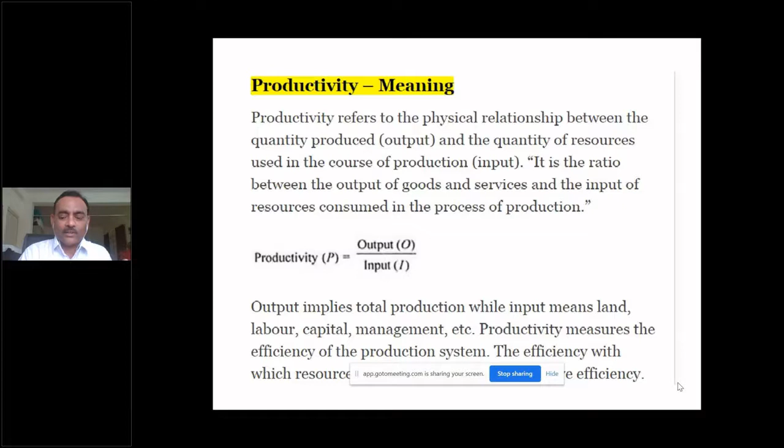As I am an engineer in Bhilai Steel Plant, I am concerned with one of the most important factors, which is a technical factor. Using the example of blast furnace productivity, in which we produce iron, I am going to describe how the productivity of a process can be improved, and what are the factors which affect the productivity.

While doing this, we know there are so many factors, some of which are positive and some negative. Not only do positive and negative factors affect productivity, they have an effect to some extent, some very small amount, but we don't know the coefficient of those factors. If we are able to know what the positive factors are, as well as their coefficient, and simultaneously in the case of negative factors also, we can improve productivity by working on it and removing or diminishing the negative factors.

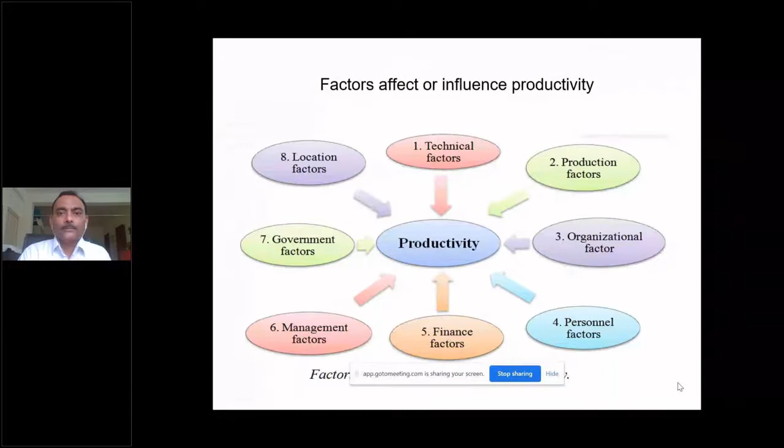Those attending this seminar have studied the blast furnace process. A blast furnace is a giant chemical reactor in which about 2758 chemical reactions take place simultaneously, more or less out of control. Note this factor, 2758 chemical reactions - it's a very big, huge number, and we are not able to control each and every one. But a few are very important, and out of those, I have taken the most important few into account.

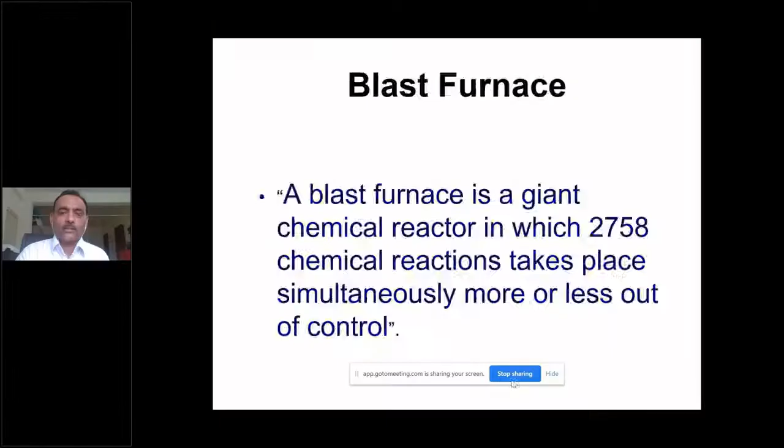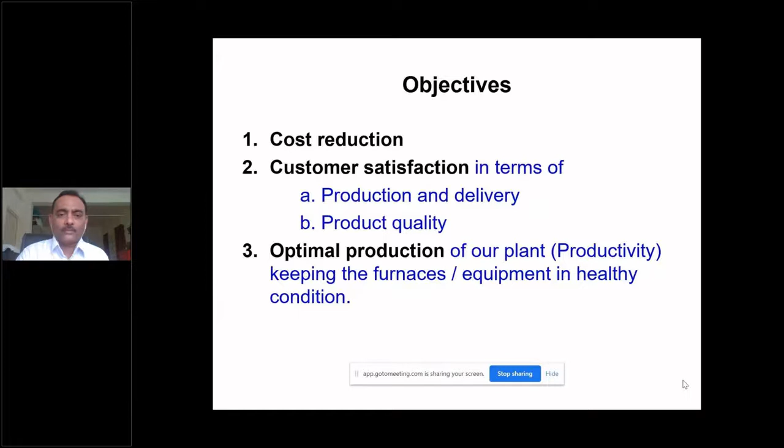The objective is cost reduction, customer satisfaction, and optimal production.

This is the overview of the blast furnace. The central part of the furnace is the basic furnace in which we put all raw materials through this skip hoist system. We send hot air at a temperature of over 1000 degrees, and the input to the furnace is iron bearing materials, which are iron ore and sinter, from which we extract iron. The second thing is we have to put coke inside the furnace, which burns. But in the process, when we send the raw materials, some undesirable particles also go inside.

They are silica, alumina, some magnesium oxide, manganese oxide, etc. All these raw materials are not needed in the furnace, but in the process they will go inside, so we have to remove them. For that we add limestone, because limestone contains lime, and lime will make slag by fluxing all these undesirable oxides.

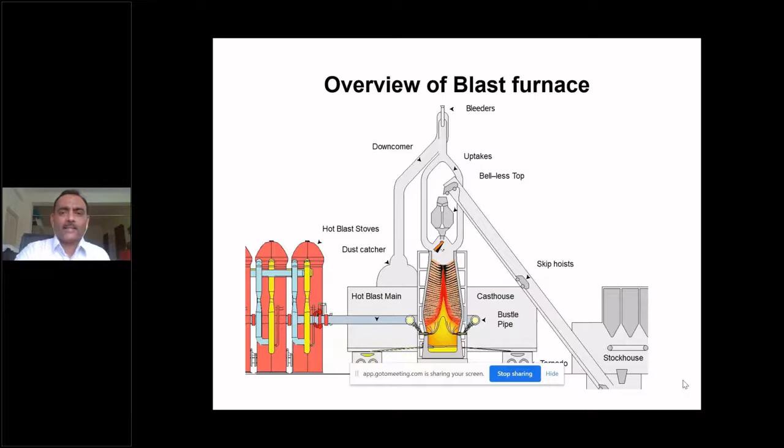And for sending hot air, we have stoves. This is the basic thing in the blast furnace, by which the blast furnace runs. These are the temperature zones. In front of the tuyeres, this is called tuyere, from where the air goes inside. Maximum temperature is near about 2200 degrees centigrade.

Everything charged inside the furnace, except coke which burns, all other raw material melts. From top to bottom, temperature will improve. We charge raw material from the top, and from the bottom level we send hot air. Because of this hot air, coke burns and melting happens in the furnace. These are the different zones in the furnace.

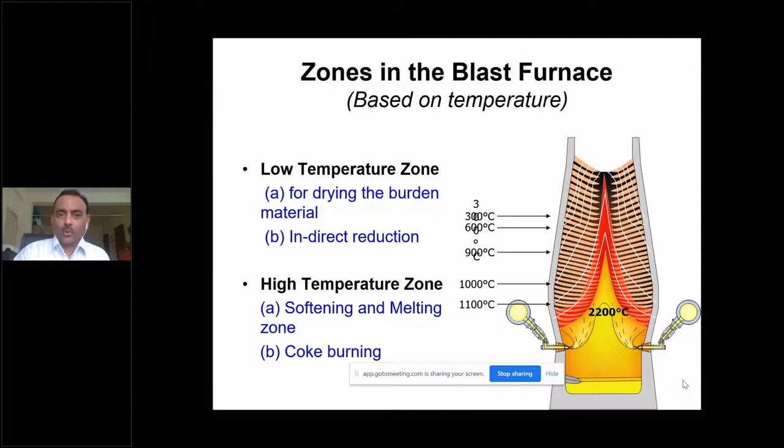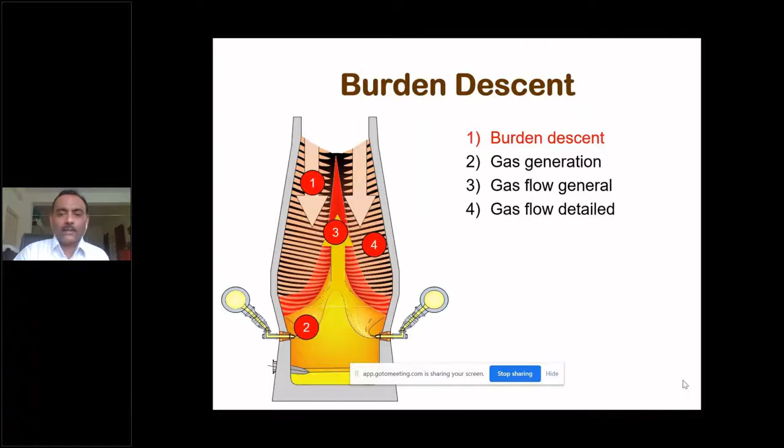Quite naturally, gases go upward and raw materials move downward. When melting happens in front of the tuyeres, we remove the hot metal and slag from the furnace. By this diagram it's clear, the coke is the only thing which looks black, through which the permeability happens.

The gases go upward, and these black layers are a layer of coke, while the reddish layer is a layer of iron bearing material like sinter, iron ore, and some amount of flux.

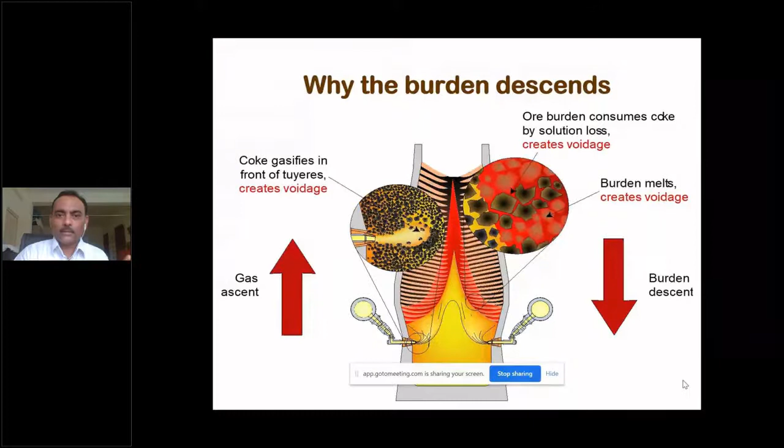This is the burden. Burden means the calculated amount of raw materials which we charge inside the furnace. Due to the reaction and melting, quite naturally raw materials move downwards. At the upward level the temperature is less, and at the downward level, when the raw materials go down, melting happens and the movement of the charge downward occurs.

But we continually charge the materials, which means the level of the furnace we always maintain, maybe 1 meter or 1.5 meter. So two forces work: upward force of blast and downward force of raw material.

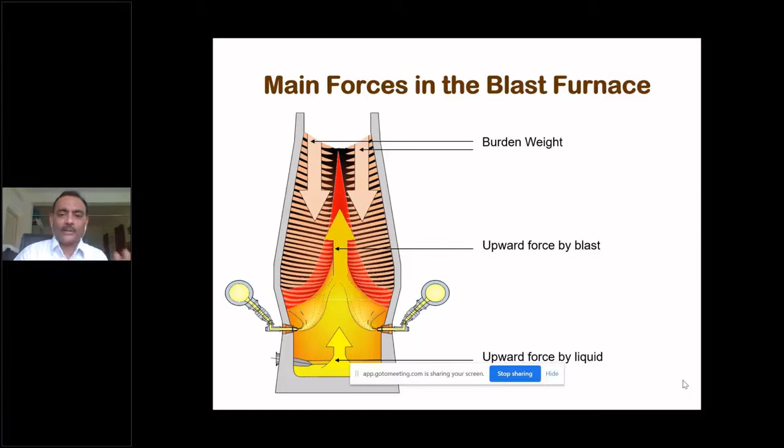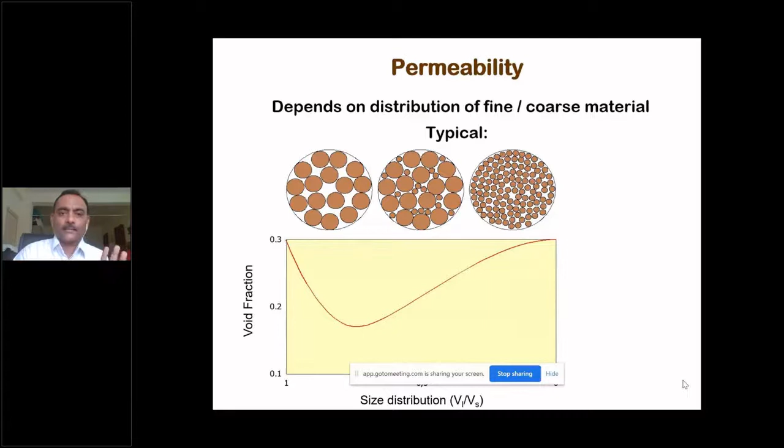Bigger size is coke and smaller size is sinter and ore. So we don't want only smaller size raw materials or only bigger size raw materials, we want a combination of both. The middle circle is correct, and this is in front of the tuyeres.

Actually my focus is productivity, and I am coming to that very soon. But for someone not knowing about the blast furnace process, we have tried to describe with this diagram how the blast furnace works.

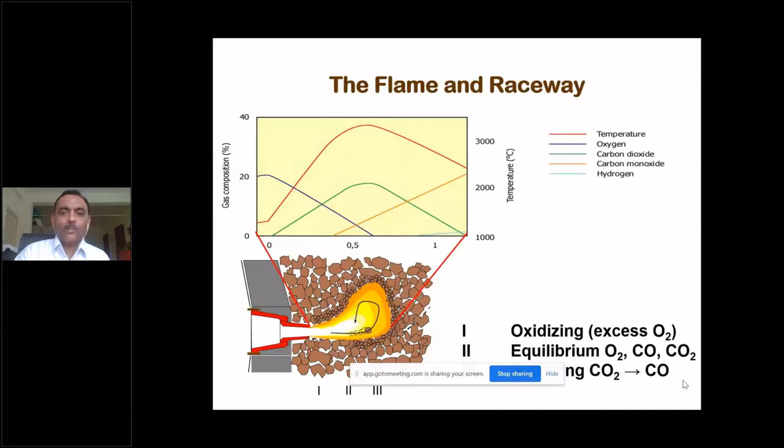Now comes the productivity part. As I said, there are so many raw materials we use. Quite naturally, we want our iron bearing material's Fe part to be good, and in our sinter, the Fe part should be good. As for coke, it must have good quality. The quality for coke is it should have very good flux, fixed carbon, and ash percentage should be less.

When you use sinter, Fe should be good. When we send hot blast, temperature should be maximized. Charging practices show how the raw material is distributed inside the furnace. When you remove the metal and slag from the cast house, what type of practices are involved in the cast house?

Not dry cast means whenever you open the cast, all the liquid which is inside the furnace should be completely removed, and then tapping should be closed. So not dry cast is avoided.

Taphole clay: as very high temperature metal and slag continuously come out of the tap hole, the clay through which the tap hole is closed, if it erodes, quite naturally we are not able to drain all of the hot metal and slag from the furnace.

Use of high top pressure: we are sending hot air from the lower level of the furnace. When it goes inside, it reacts with the carbon and forms carbon monoxide. Carbon monoxide, which goes inside, comes in contact with Fe2O3, iron ore, downwards. So the reaction between gases and solid should be more.

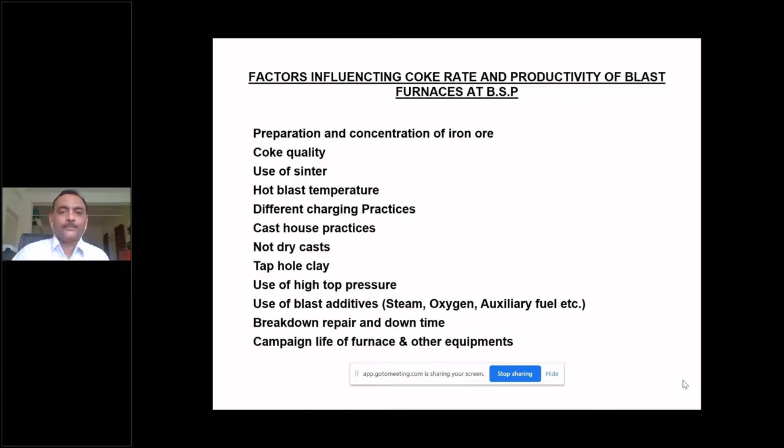Now comes the productivity part and coke rate part of the blast furnace. I have to explain by example, as I'm sitting in this room which has some volume. As well as that, when we talk about the engine, it has some volume. As well as in case of any type of equipment which we're using for production, the volume of that equipment is a very, very important factor.

So in case of blast furnace, what is the volume? The inside volume in which we send the raw materials. Now if a furnace is producing 1000 ton per day, and the volume of the furnace is also 1000 meter cube, so in case of blast furnace, the definition of productivity is tons per meter cube per day.

As a second example, productivity based on working volume. As well as that, from the hearth area point of view, we can also calculate the productivity. We can also calculate the productivity by useful volume. So these are the formulas written.

So as I said, a 1000 meter cube furnace, if it produces 1000 ton a day, the productivity is 1 ton per meter cube per day. If by working on the factors which affect production, somehow I am able to produce 1200 ton from that furnace, in this case my productivity will come to 1.2 ton per meter cube per day. But how have I done it? How have I improved the production? So here comes the calculation part of the productivity.

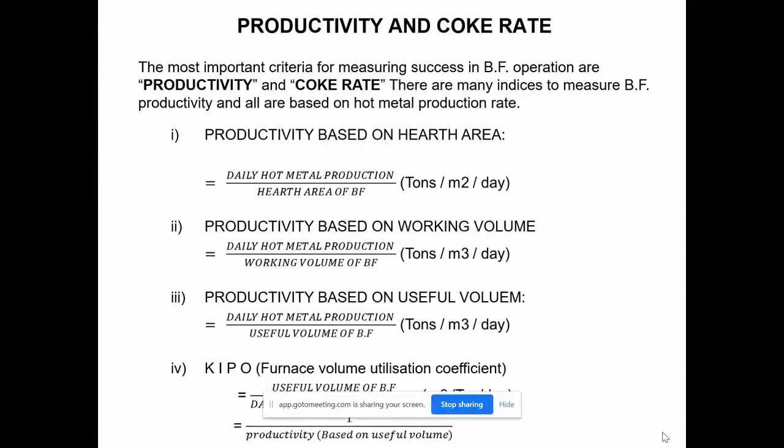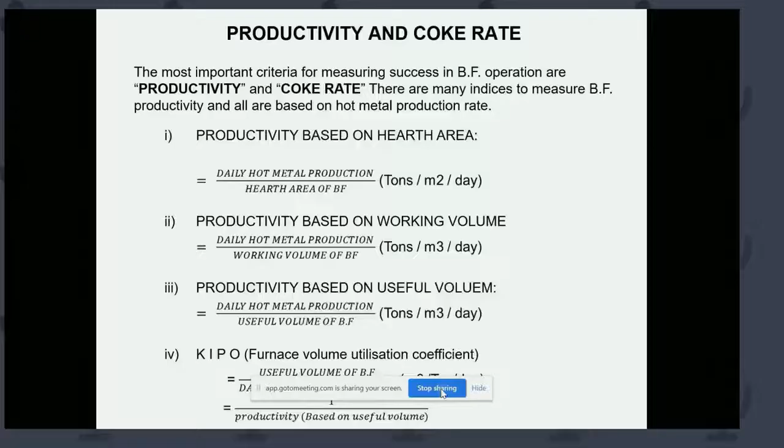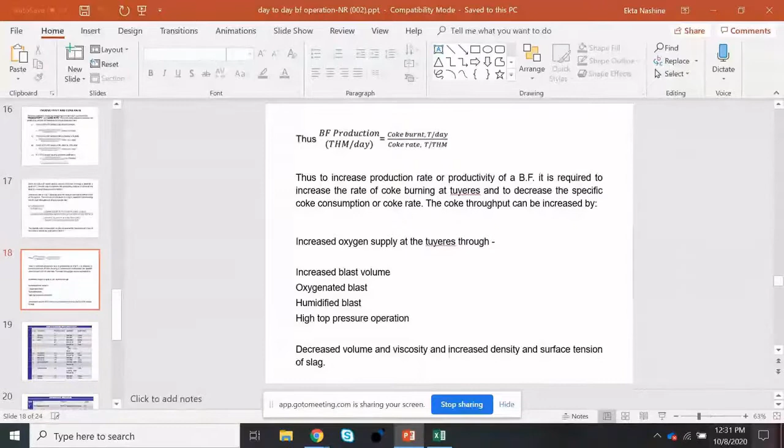Hello, sir. Yes, sir. Your PPT is visible, sir. Next slide, I am not able to move on. Just a minute, sir. Okay, sir, now it's visible. No, sir, the video is not available. Okay, it will connect now. PPT is visible, yes, but the video, camera is not available. Video part is not available. Now it's okay, sir. You can share slides, sir. Okay.

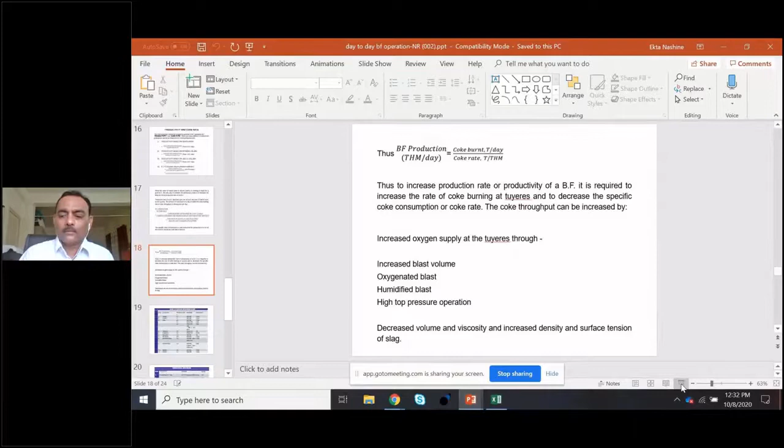So these are the definitions of productivity. It means from a furnace, if I am able to produce more tons, my productivity improves.

As well as in case of coke rate. Coke rate is what? For producing 1 ton of hot metal, the amount of coke which is needed, that is called coke rate. In a fixed volume, we are charging two things: one is coke and another is non-coke. If I'm able to reduce my coke, quite naturally, from that fixed volume, non-coke will incorporate more. I have to look at my heat value, because from coke heat will come, from hot blast heat will come, from coal dust injection heat will come.

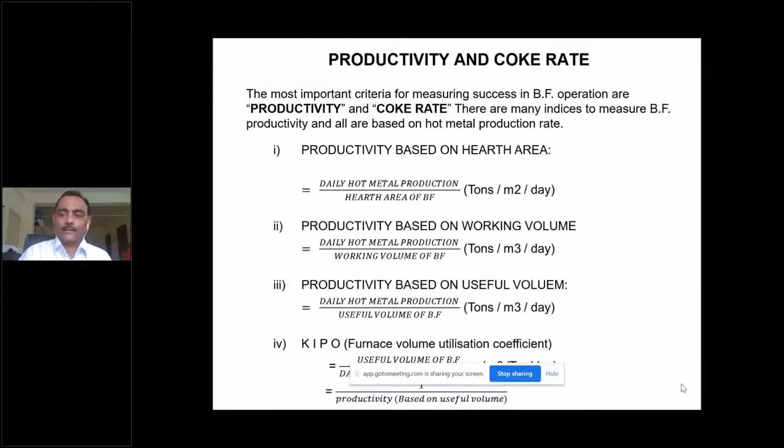So I have to counteract. But if somehow I am able to reduce the coke part for 1 ton of production of hot metal, quite naturally, again my productivity will improve, because my production will improve and coke rate is reduced. So in the process of making hot metal from the blast furnace, if we are able to reduce coke rate, naturally productivity will improve. They are both indirectly proportional. These are some definitions and how it will improve.

Here comes the productivity of some of the world's best furnaces, their burden, and what are the injectants. Injectant means, as well as coke, they are charging some amount of coal, that is called coal dust injection. In some areas where gases are available, natural gas, mostly in South America, they are injecting gas also. Some inject oil also. In some areas, they're introducing one or two more things with coke.

Burden: in the era when lump ore was reducing too much, from the 1970s, sinter comes into the picture. Sinter is nothing but small particles of ore which is agglomerated.

Agglomeration is heating just below the incipient fusion, meaning small particles of iron ore with fine particles of coke and lime dust, combined with the help of moisture, are preheated up to that temperature where melting will not happen. Only the particles combine with each other. The surface gets hot and they join each other, so small particles become a bigger particle. In the blast furnace, as we need some size of material, this can be charged inside the furnace. That is called sinter. With the help of microfines, we are able to produce pellets. So these are the burden part and injectant.

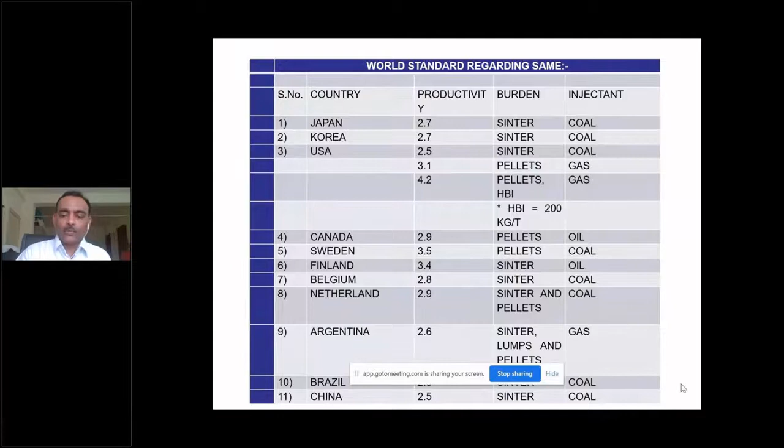And these are some best parameters related to the factors which I mentioned. One furnace in Netherlands, furnace number 7, Hoogovan - Hoogovan is the design of the stove - their productivity reached 3.37 tons per meter cube per day. In the same furnace, their coke rate is 268, very small. I'll come to the picture of Bhilai also. The 268 kg per ton of hot metal is very small.

There is one furnace in Japan in which the coal dust injection reaches up to a level of 266 kg per ton of hot metal. Hot blast temperature in Japan, one furnace, 1350 degrees centigrade. Top pressure 2.5 kg per centimeter square - very high, the furnace needs very good strength. Slag rate 203, very small. Oxygen enrichment up to 13.2. Oil injection 100, natural gas 130 normal meter cube per ton of hot metal. Silicon very less, 0.17.

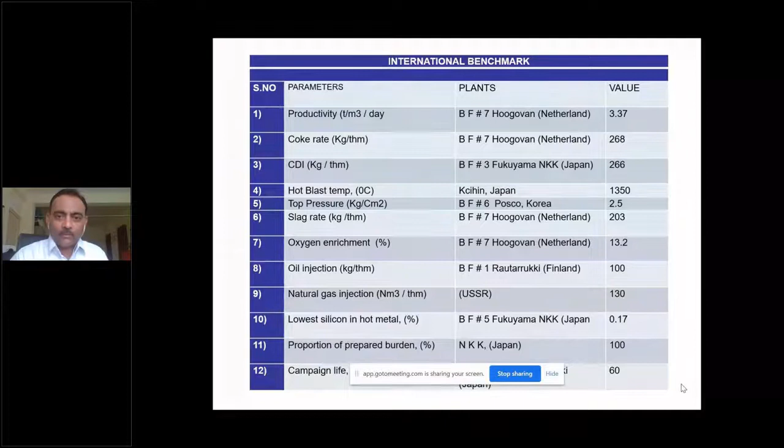My reason for using this slide in this presentation is so that you will remember some levels and values here, for when we come to my part on productivity calculation, which I did somewhere around 2011. I did a project on productivity.

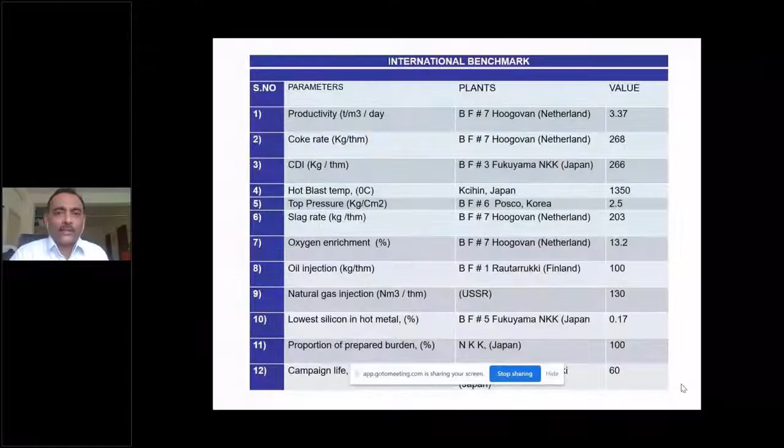So I am very fortunate that I was given the responsibility of doing a productivity calculation from 2009 to 2011. This 3-year data of productivity, coke rate, hot blast temperature, N/D cast, sinter percentage, blast pressure, top pressure, volume, oxygen enrichment - this is BF5. I have taken this data.

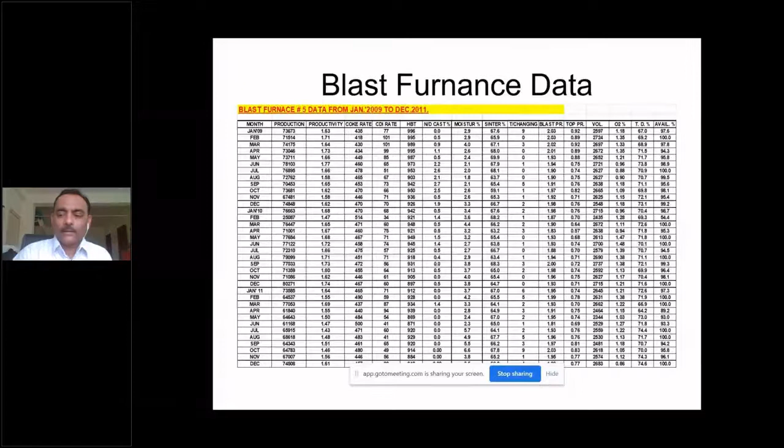I'm not sure, but I think most people understand the modeling analysis part. There is software in which if we put all this data for a regression analysis, these things come out. We know multiple regression analysis as well as linear regression analysis. There is a formula in linear regression analysis: y equals a plus bx. Y is the dependent variable, a is the intercept, b is the coefficient of the independent variable x.

But it's not multiple because only one factor is calculated. When you do multiple linear regression, you get one value - maybe coke rate or productivity - but there are so many factors. As we are seeing, there are more than 2000 factors, but we take the main 10 to 15 factors for the regression analysis from the 3-year data of blast furnace 5. When we put in these values and did the regression analysis, one very nice thing happened - that regression analysis.

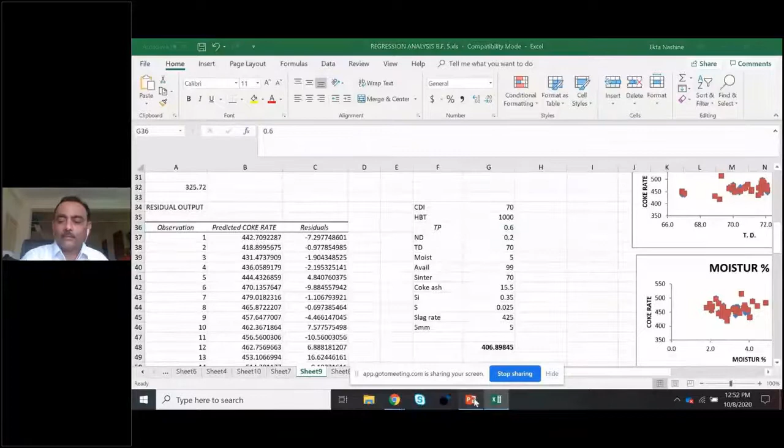So here comes the suggestion part. By this analysis, what we learned and what suggestions we are going for, for improving our productivity and coke rate.

If we modernize our equipment, if we run a furnace with larger size - you see, blast furnace at Bhilai Steel Plant has 7 furnaces, now the 8th furnace has come into our fleet. It's the biggest furnace, with a volume of 4060 meter cube. Our BF7, after modernization, had its volume improved from 2000 to 2300 meter cube. Our older furnaces 1, 2, 3 have 1033 meter cube volume. Our middle size furnaces 4, 5, 6 have 1719 meter cube.

So as time has gone on, bigger furnaces have come into the picture. What we have learned in this process: bigger furnaces mean less input, more output, less energy, less labor. So these are the suggestions - larger blast furnace operation, high hot blast temperature, increased percentage of oxygen enrichment.

When oxygen goes inside - okay, the air you are sending has 21% oxygen, plus when you send pure oxygen at 1, 2, 3 or 6%, what happens? The formation of carbon monoxide at the lower level improves drastically, and this carbon monoxide rich furnace, when it reacts with the downward movement of iron oxide, the gas-solid reaction improves, and productivity improves.

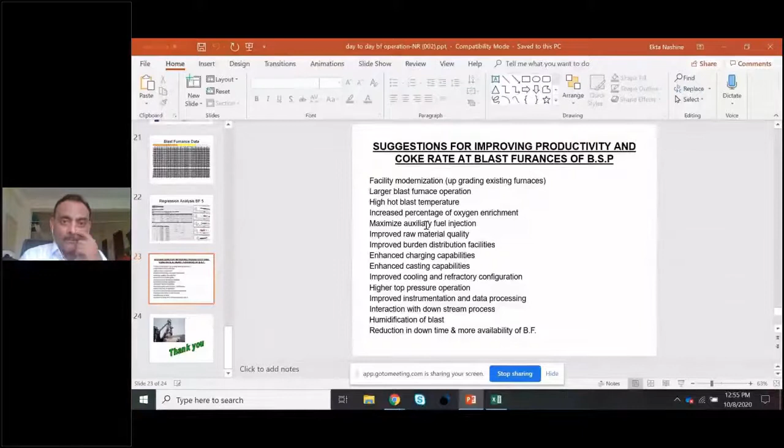In our BF8, we have reached up to 8% of oxygen enrichment also. Recently, as you have read in the paper, we have achieved plus 9,000 tons of production also from that furnace.

So if the raw material improves, meaning in iron ore, if we are able to get more Fe, in sinter higher Fe, washing of the coke, washing of the iron ore, all this helps in the process. Improved raw material quality, improved burden distribution facility.

Raw material is basically called burden. A calculated amount of non-coke with coke is called burden.

Just imagine a 30 to 40 meter tall structure having a volume of near about 2000 meter cube. You are filling the raw material inside the furnace. It cannot simply be thrown inside the furnace. You have to distribute raw materials in the proper way.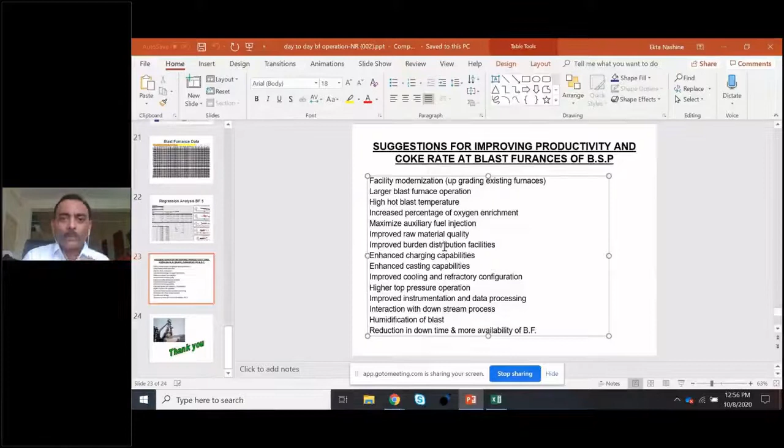The people who know about the distribution, there is one chute at the top. That chute rotates inside the top of the furnace. We are able to change the angle of the chute as well as the rotation of the chute.

It's just like the process of making rangoli. If a person has a small powder of rangoli in hand and wants to make a rangoli, what do they do? They are able to put any color, anything at any place. Same is the work of the chute inside the furnace. It rotates and changes its angle, so you can put any of the raw material at any place.

You can do circular charging, segmental charging, spiral charging, spot charging. So for any area where you want coke or non-coke, how do we know which one?

There are probes on top of the furnace. The gases going out of the furnace will show the temperature in different zones. So if you feel this zone is not active, we can improve coke in that area, or if it's highly active, or if channeling happened, for that we do the distribution.

Most of the time we do a common distribution: one layer of coke, one layer of iron ore, layer of coke, layer of non-coke, one by one charged inside the furnace to maintain proper permeability.

So this distribution part, if you improve it, if you are able to improve the charging capabilities - how do we improve charging capabilities? Previously we were working with the skip charging system.

Charging with the help of a skip takes some time from the stockhouse bottom level, skipping it up to the top. One skip will go up, when it goes up the other will come down, take the charge, go up again, and come down - this process will run. But what happened is it has some limitation because it takes time.

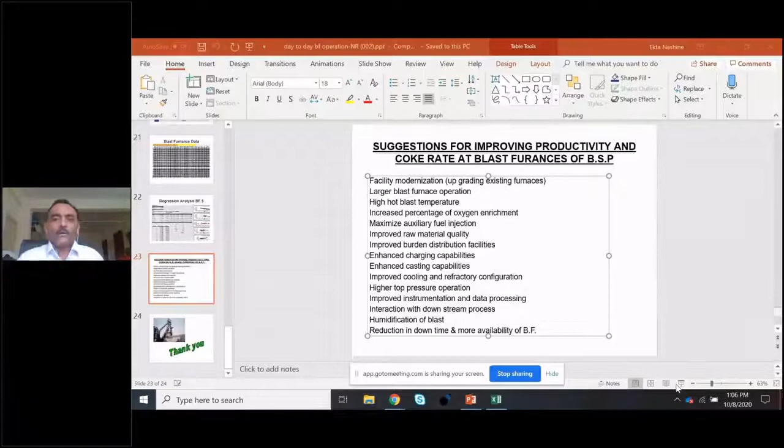Now, from a little bit, I'm removing my talk from technical to some different area. We have seen this process, blast furnace. There are so many factors - raw materials input, sending air at very high temperature, getting the production. In the production, quality also affects. Good quality, bad quality. If the quality is good, we are able to produce more, and when productivity improves, quite naturally the main target, which is getting production from an equipment, if it improves, it in turn improves the productivity.

While doing this thing, one small thing came to my mind - producing iron from an equipment. There is a factor. So productivity of a process, a technical process - can humans also be able to produce more? Can we able to improve our productivity? Why not?

We are seeing in our day-to-day life, we are doing everything - sleeping, eating, doing exercise - we are able to improve the quality of our life. What are the factors? So many factors. Time management is a factor, emotions control is a factor, reading is a factor, emotion control as well as spiritual learning is a factor. These are so many factors.

It varies from man to man. So if we know as an individual what factors work for me, which give me a chance to improve my life, and what factors affect me positively and what factors affect me negatively - by this regression analysis, I work in my life also.

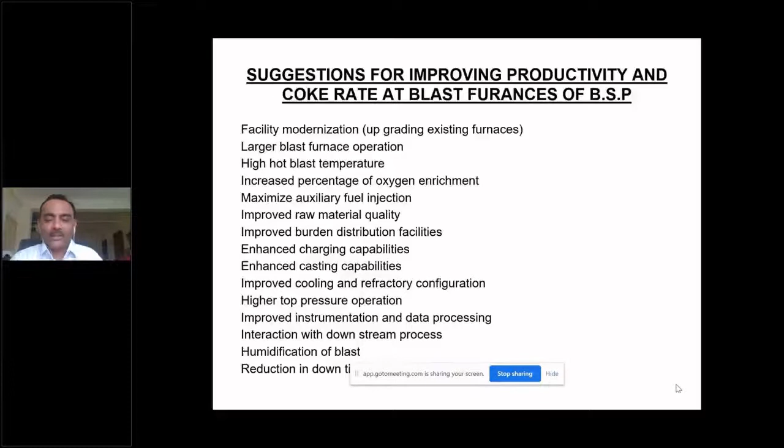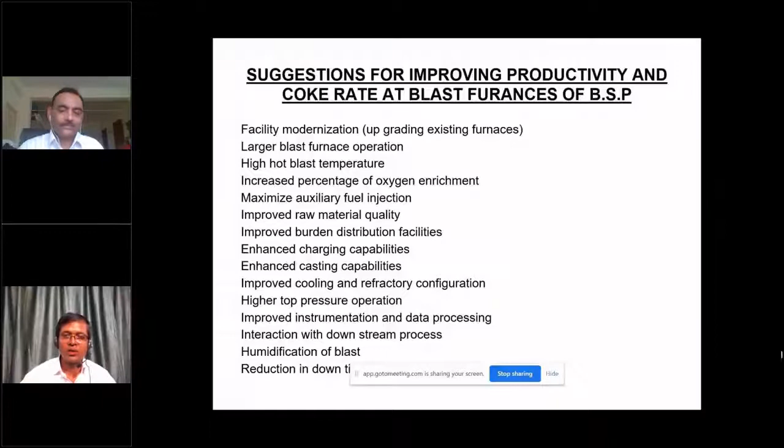Please participants, if you have any query, you can ask. Good afternoon, sir. Okay, thank you. Hello, sir, sorry for the interruption. I have a question for Vikas sir - in case of waste management point of view.

Regarding slag, sir - how to utilize this slag in case of environmental aspect? Okay, thank you very much for giving me this opportunity. Do you ever visit Bhilai blast furnace or any blast furnace?

Sir, yes sir, I have in my past experience, experience with Bhushan Steel in case of Jharsuguda, Odisha. Very nice, I have learned. Yes sir, we have 200 TPD of that particular blast furnace. Later on it was expanded, but my field is casting machine, sir. Okay, so about casting, that particular casting machine. Yes sir. Okay, yes sir, okay, okay.

Oh sir, slag, I will have time also, so let's talk about the slag also. Slag comes from all the raw materials. When you charge iron oxide, which is Fe2O3, when you see the composition of iron oxide, there is silica, SiO2, 5 to 6%. There is alumina, 3 to 4%, as well as some amount of manganese oxide, some amounts of magnesium oxide, etc. in the raw iron ore. Sinter, almost the same. Coke ash - fixed carbon is near about 85%, ash is there 13, 14, 15%. Ash is nothing but alumina and silica. So whatever raw material you charge inside the furnace, all these other oxides come inside the process. These oxides are removed - mostly these oxides are either acidic oxides or neutral oxides. So to remove these oxides, we need calcium oxide, meaning lime.